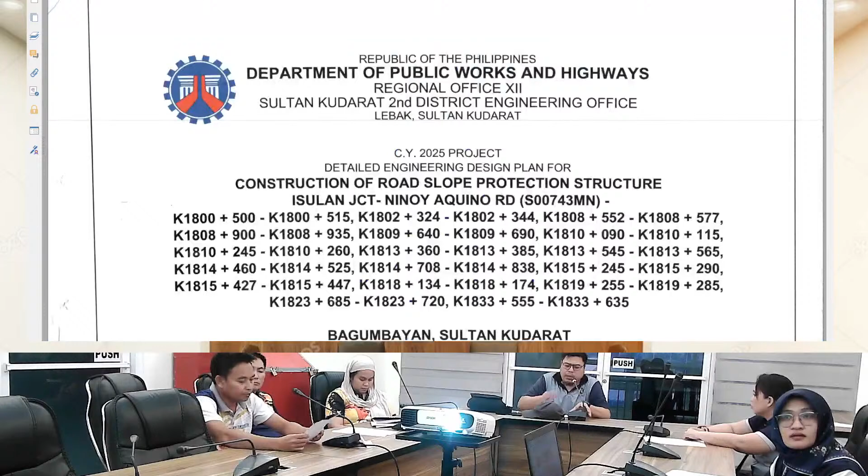The agenda of this pre-bid conference: first is the explanation and presentation of the basic contract data, including contract restriction, ABC, and the duration of the projects, to be given to us by the planning and design section. Here with us is Engineer Rafanhanie Kimamao and Engineer Farrah. After that, the BAC secretariat will be explaining the requirements of the bidding documents, including the instruction to bidders, general conditions of contract, and the special conditions of contract.

They will also discuss the document to be submitted by the bidders, as well as the post-qualification and post-evaluation of the projects. After that, we'll have questions and comments from the bidders, and the replies of the BAC.

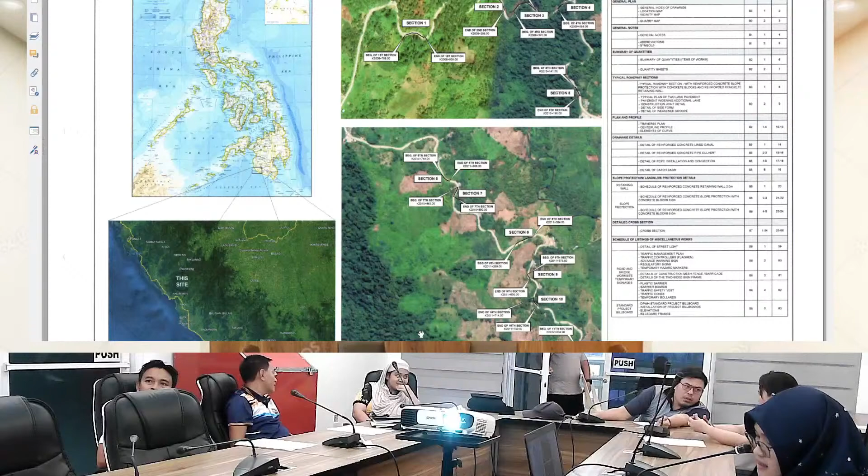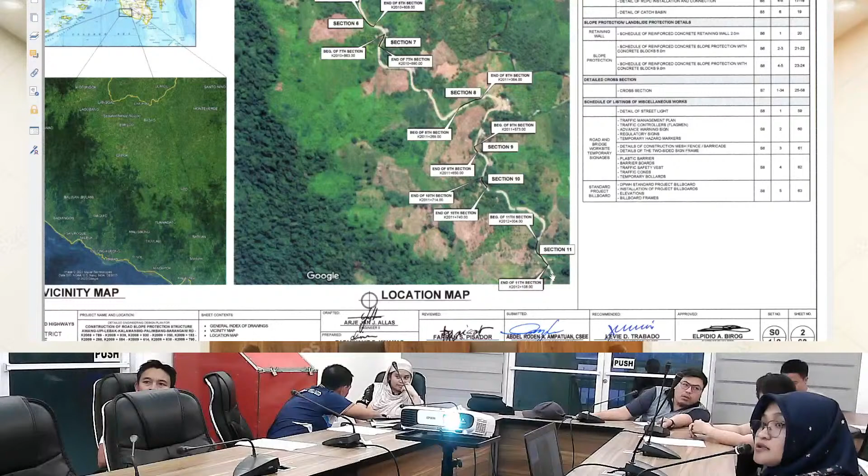This project consists of multiple construction of road slope protection along the stations stated in the project name. This is the location map of each section, from here up to here. This project has a total of 11 sections.

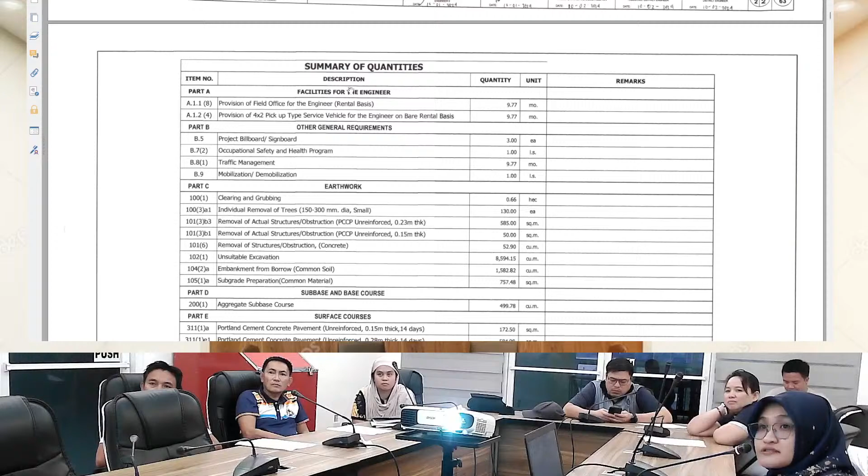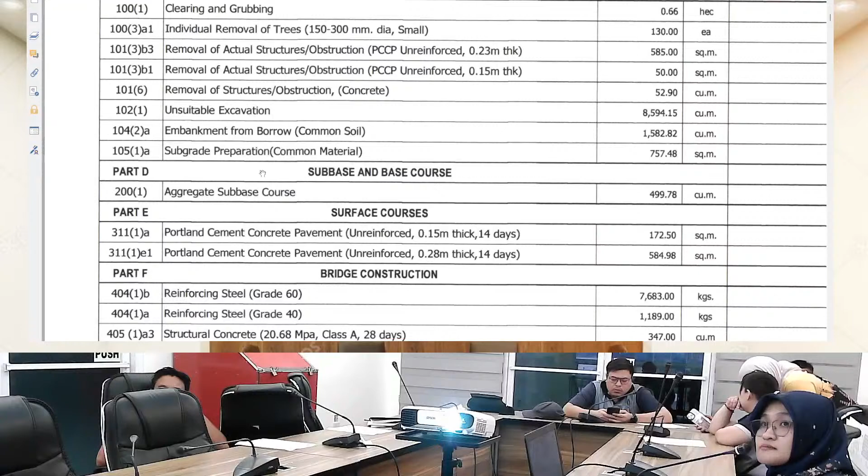These are some of the general notes, construction notes, abbreviations, and symbols found in the DED plans. This is the summary of quantities: provision of field offices for the engineer, provision of a 4x2 pickup type service vehicle, project billboard, signboard for DPWH and COA, occupational safety and health program, traffic management, mobilization and demobilization, clearing and grubbing under earthwork, individual removal of trees, removal of actual structures for the main PCCP and shoulder, removal of structure obstruction, PCCP for the shoulder, removal of concrete structures existing in the location, unsuitable excavation, embankment from borrow, and subgrade preparation.

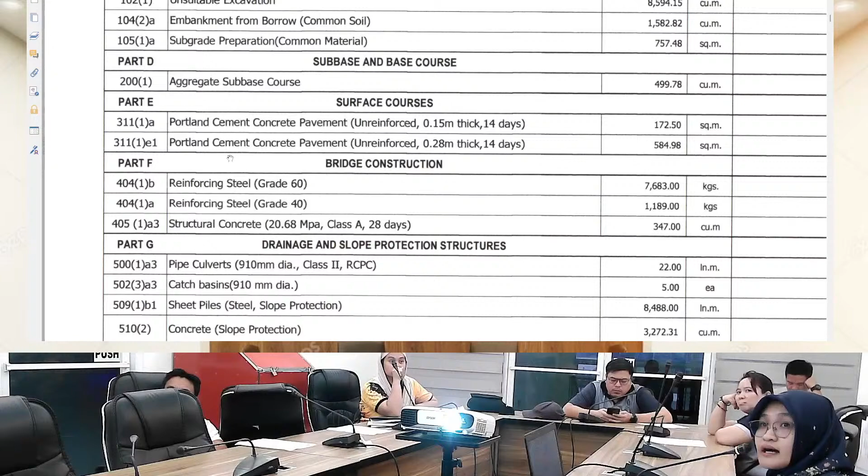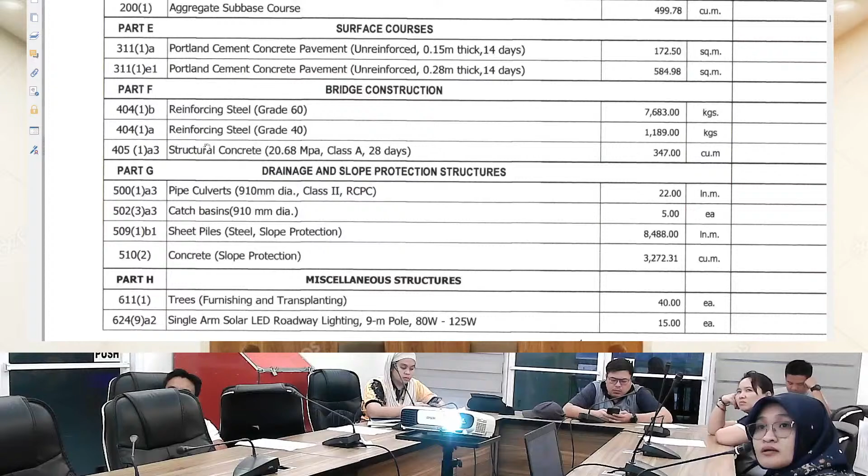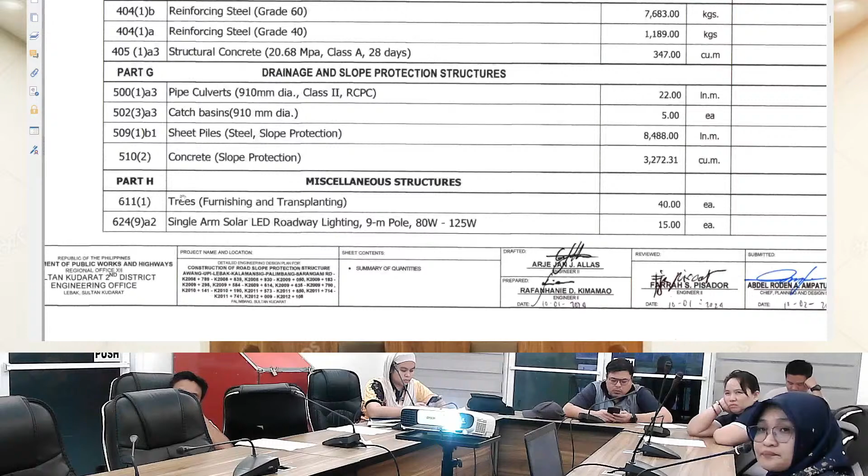Under subbase and base course, we have the aggregate subbase course. For surface courses, we will be replacing the main PCCP and shoulder, that's why we have PCCP unreinforced for the shoulder and for the main PCCP. Here we have reinforcing steel grade 60, and reinforcing steel grade 40. This is, I think, for the works on canals and catch basins, as well as the structural concrete for its concrete components. Here we have the pipe culvert, catch basin, sheet pile for the slope protection, steel sheet piles, and the concrete slope protection. We also have miscellaneous structures such as trees furnishing and transplanting, and of course single-arm solar LED roadway lighting with a 9-meter pole.

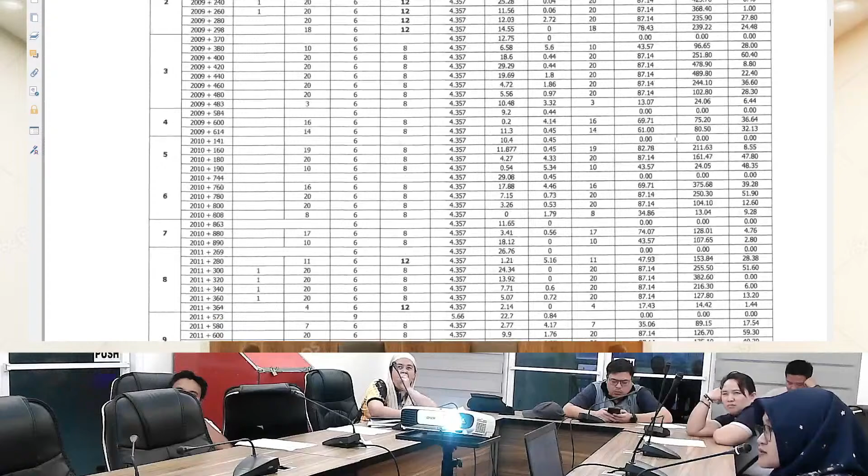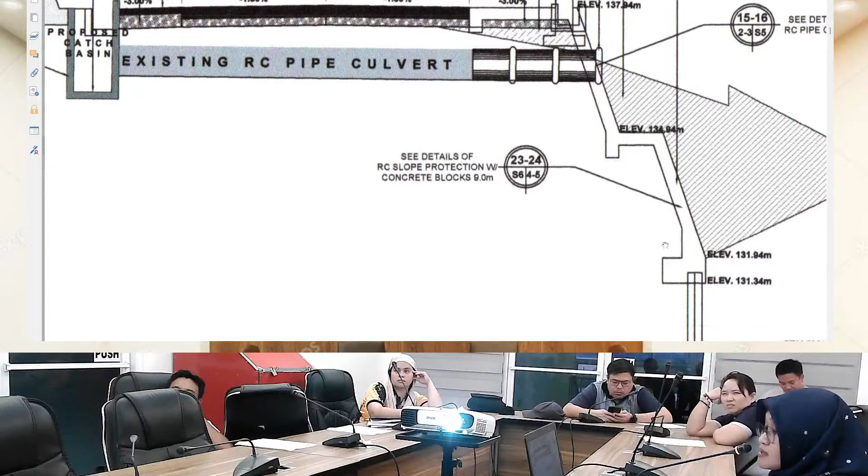This is the volume of the RC slope protection, volume of cut and fill. This is the station quantity. Then we have the typical sections, two different sections: the 6-meter type RC slope protection structure with sheet piles, and the 9-meter RC slope protection with steel sheet pile.

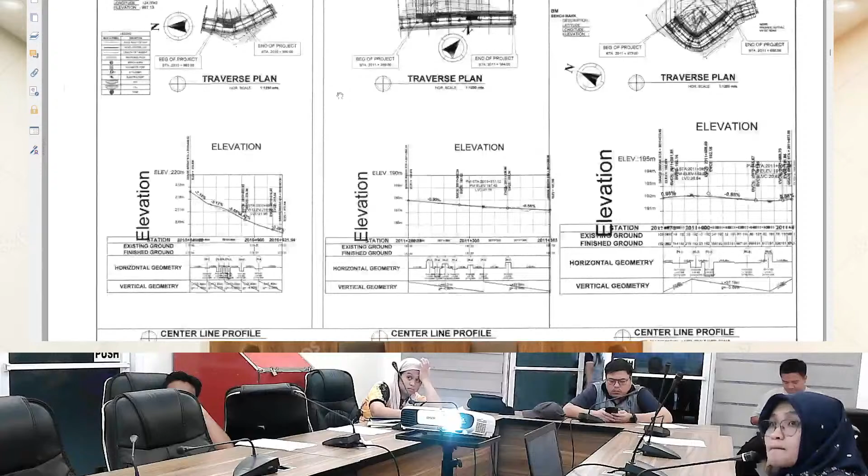Here for the construction of its PCC or its pavement, we have the typical plan of the 2-lane pavement, and we also have widening at some sections of this road's slip structures. So we have the profile and plan and profile of each section. As I've said, we have 11 sections for this project.

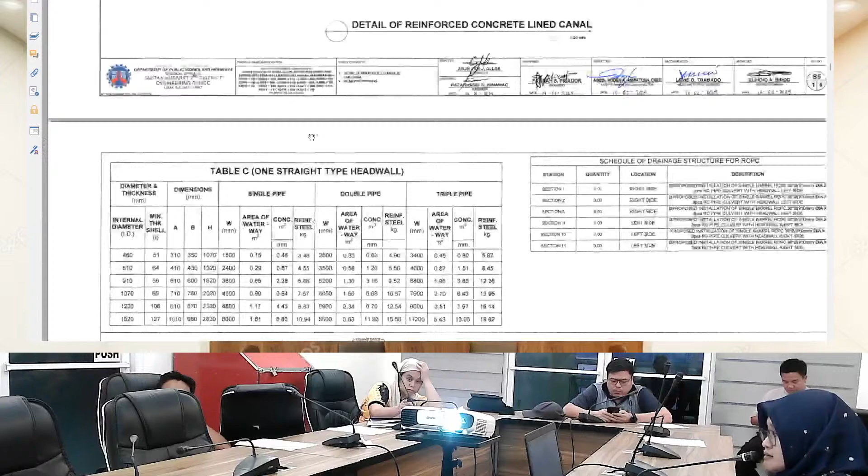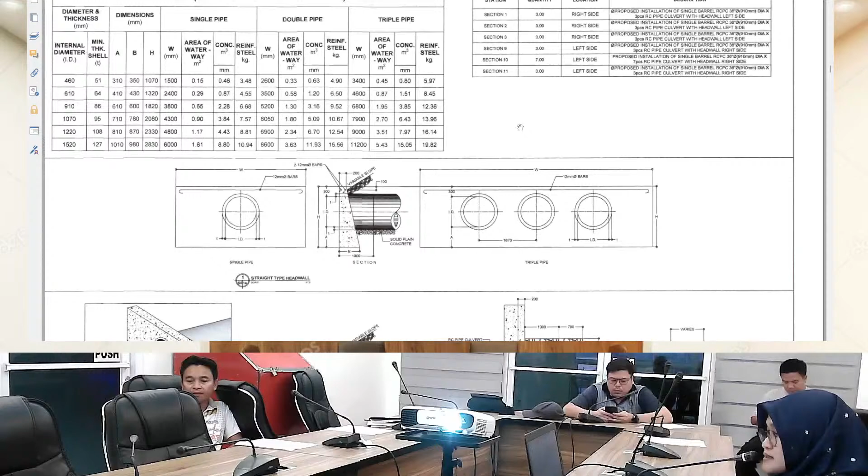Here is the head wall, details of the bars of the head wall, and the section, schedule of the drainage structure for the RCPC, showing which station or section it's located. This is the typical details for the head wall of the RCPC.

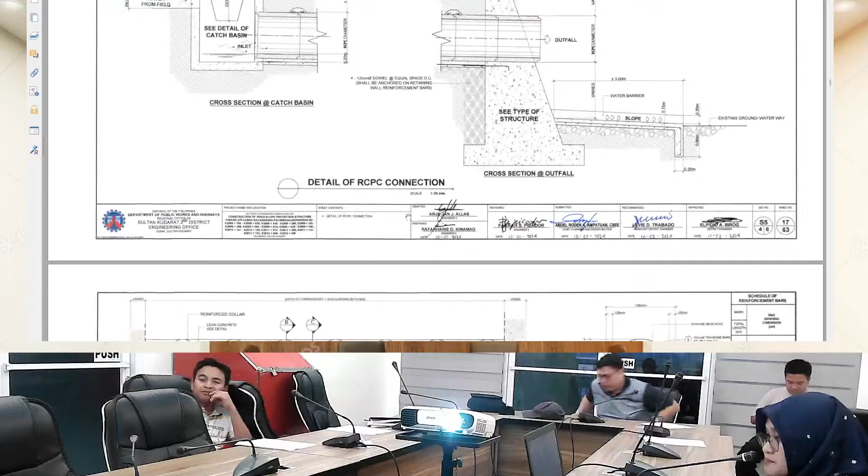Here we have the design requirements for the RCPC, where we find the required design components for the RCPC. Then we have the catch basin, the details plan and detailed cross-section of the catch basin and its RCPC connection.

This one is the details of the RCPC. In this project, we used 910mm diameter RCPC. Here are the details for the catch basin as well as its bars and the schedule of its reinforcement.

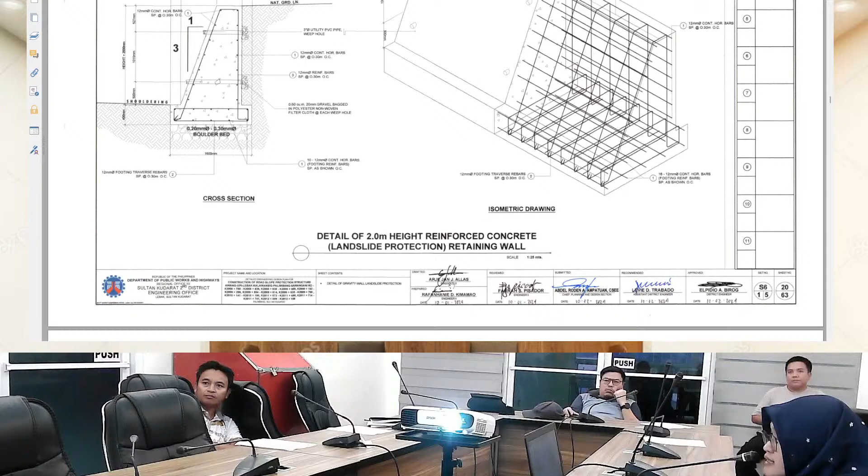We also have a retaining wall at some sections of this project. We put a retaining wall for the landslide side. It's 2 meters height reinforced concrete, and this shows its details.

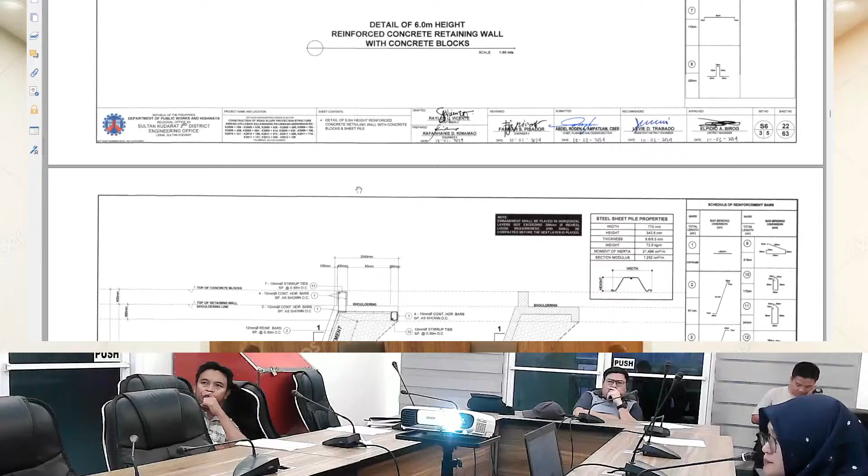This is another layout for the 6 meter height reinforced concrete. This one is the 9 meter height, so a 9 meter RC slope protection with an 8 meter height steel sheet pile. The sheet pile we used here is Z-type steel sheet pile.

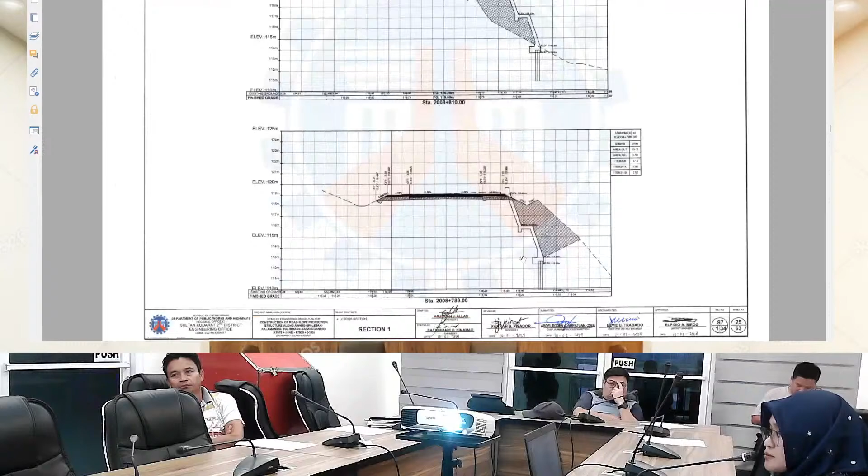Actually, only one section was used for the 9 meters; the rest is 6 meters. Here we have the details for its cross-section.

We can see here the area of cut, fill, area of item 200, 311, and PCCP of the main PCCP and the shoulder. So from page 25 up to... this is the detailed cross-section from page 25, at least 32 pages of cross-section.

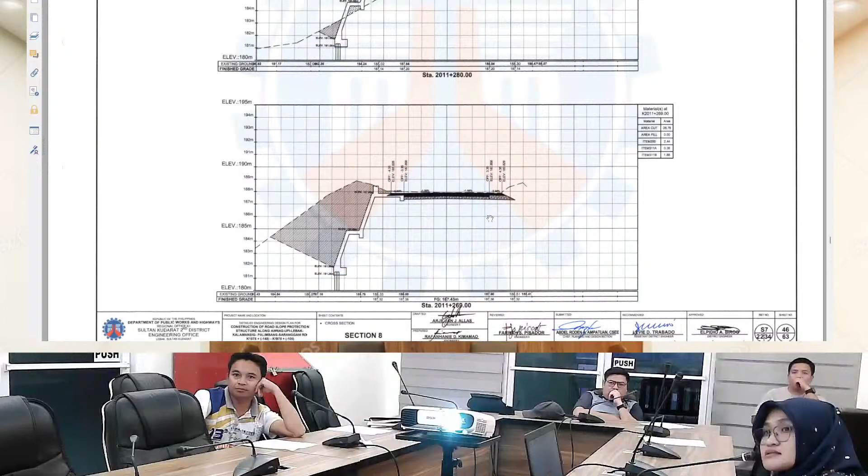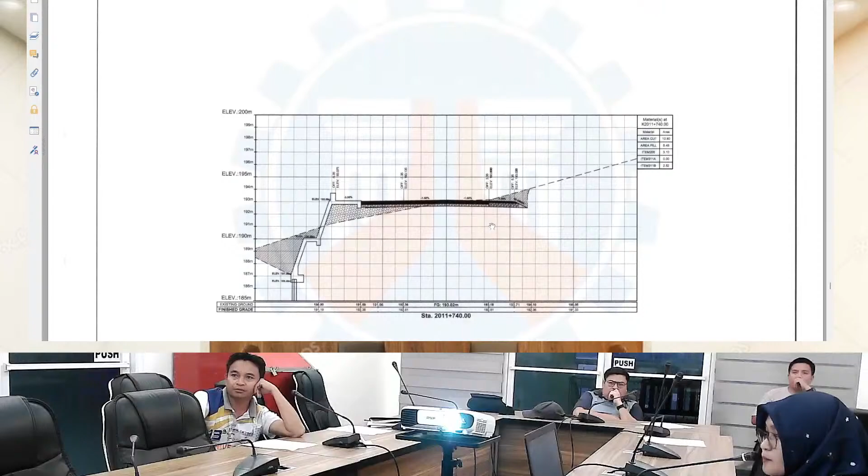Since we have 11 locations or sections where our structures will be placed, that's already 32 pages. So finally, from page 25 to page 56, I think that covers the cross-section pages.

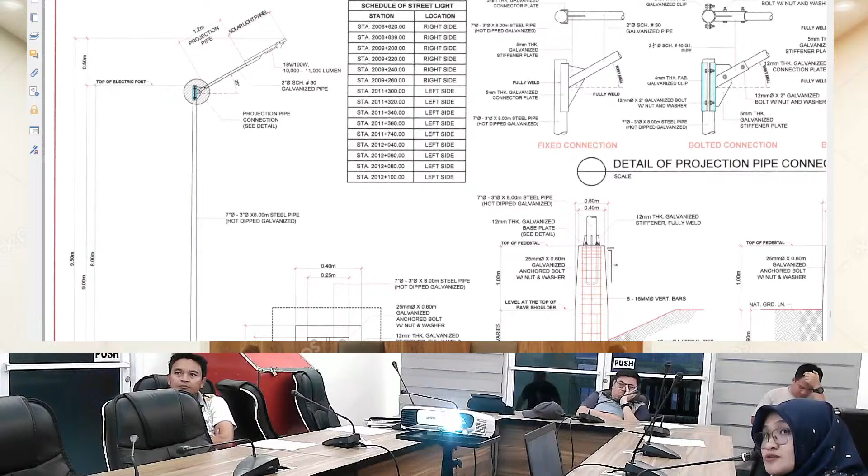And then we have some miscellaneous structures. We have street lights, and this shows the details of the post, and the components that our solar LED street lights should have. And of course, the schedule of street lights showing location, what side of the road, and where they should be installed.

By the way, for street lighting, what we can see here is the solar LED roadway lighting as well as its post. But the concrete post and the footing, we can see those in item 400, where the structural concrete and structural steel components of our post are indicated.

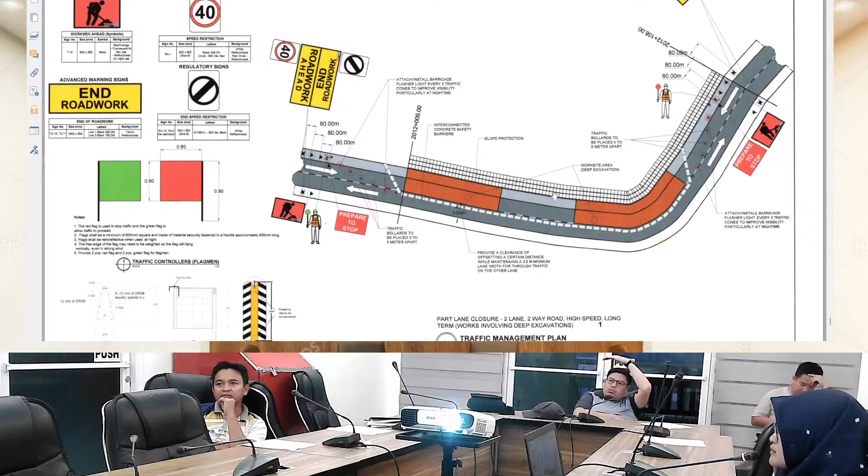Then we have the traffic management plan. This is the longest section since we have 11 locations, 11 sections. This is the longest, and this is what we decided to have as a typical section, since the work is not done all at the same time, or if it is, only 1 or 2 sections at once. So this is the typical traffic management plan.

And of course, the installed roadway safety signages, and more signages, as well as the safety gears of our workers. And of course, the details for the billboards for COA as well as for the DPWH billboard.

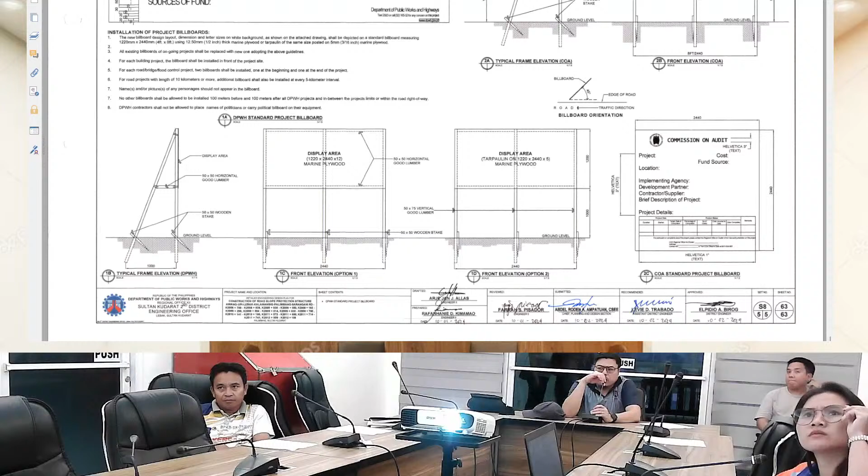You can also proceed to this office for further queries to our planning and design section. This will also be posted on our PhilGEPS. You can scrutinize it, then come to us if you have any comments or suggestions. If there are mistakes in the plans, since we are not perfect, you can also come to us and we will see to it that your concerns are acted upon. So next stop is the buildings.

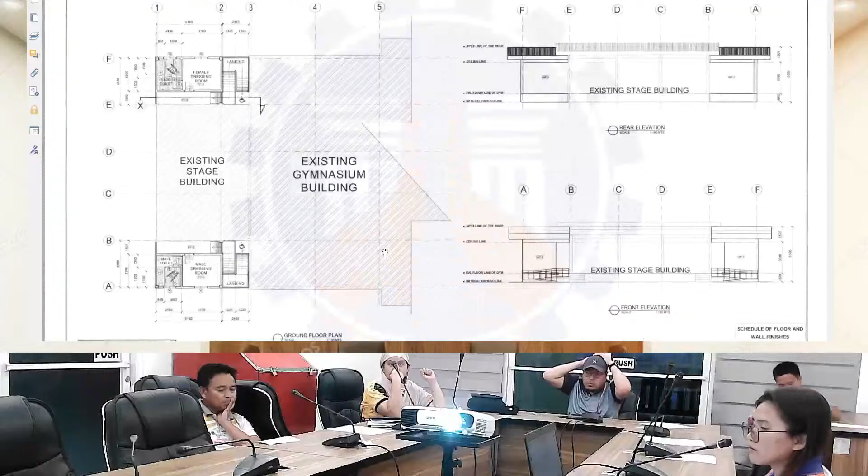And the site development plan and the location map. Next, we have the floor plan of the stage, here on the right side and here at the left side.

Next, we have the elevation for the rear and front, the typical side elevation and cross-section of the stage, schedules of doors and windows and its description, and the reflected ceiling plan of the expansion of our stage.

Next, we have here the roof plan, the details of the ramp, section detail of the toilets, here.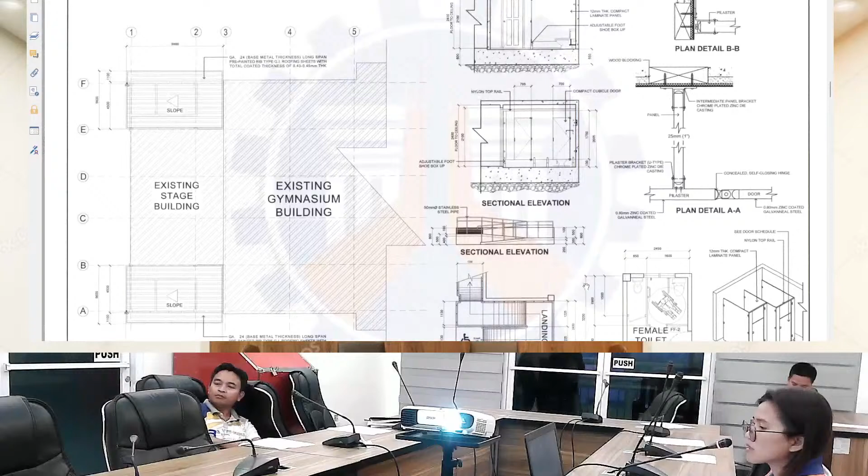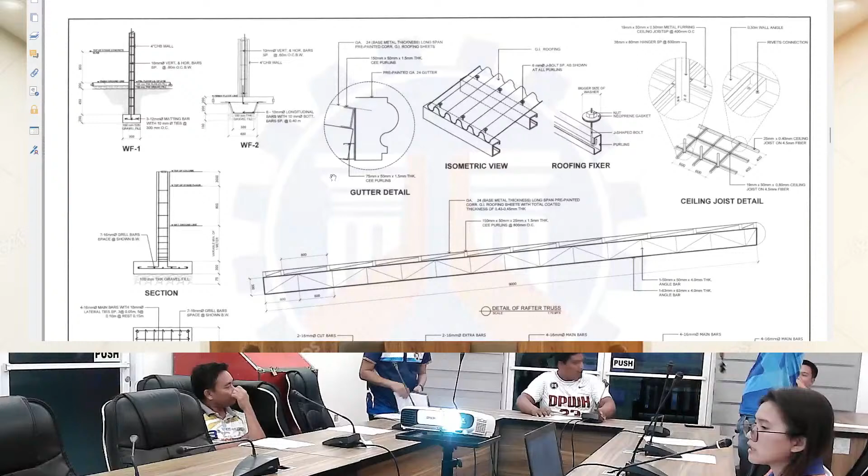Next, we have the foundation plan, the roof framing plan, and the details of our trusses, beams, ceiling, wall footing, footing to column, and beam detail. We also have here the general construction notes for our guidance.

And we also have here for our plumbing works, the water line layout plan and sanitary and drainage layout plan. We also have the isometric view, the detail of our septic vault, and the typical detail of our connections of pipings from vertical to horizontal.

Next, we have here for electrical works, the lighting and power layout plan. And for this page, we have the bill of quantities for the project.

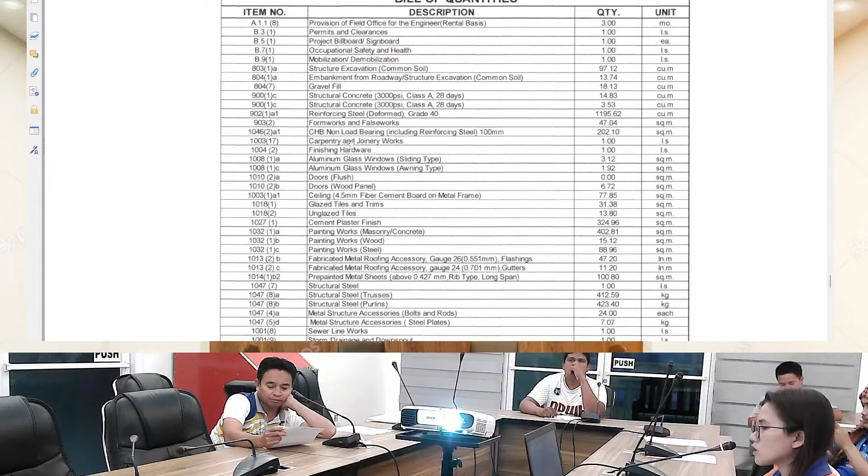We have here the provision of field office for the engineer, permits and clearances, project billboards and signboards, occupational safety and health, mobilization/demobilization, structure excavation for common soil, embankment for roadway or structure excavation common soil, gravel fill, structural concrete, reinforcing steel.

Grade 40, formworks and false works, CHB with reinforcing steel, carpentry and joinery works, finishing hardware, aluminum glass windows, sliding and awning type.

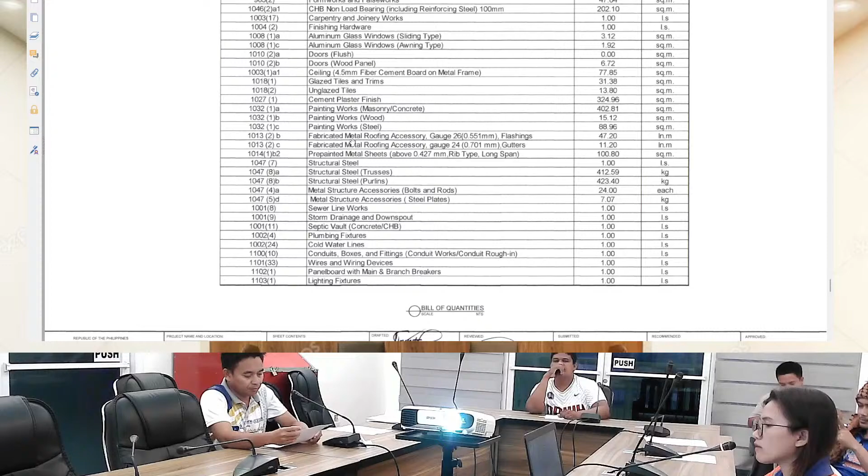For doors, we have flush and wood panel. We also have ceiling, glazed tiles and unglazed tiles, cement plaster finish, painting works for masonry/concrete, wood and steel. We also have the fabricated metal roofing accessories, flashing, gutter, and pre-painted metal sheets, long span roofing.

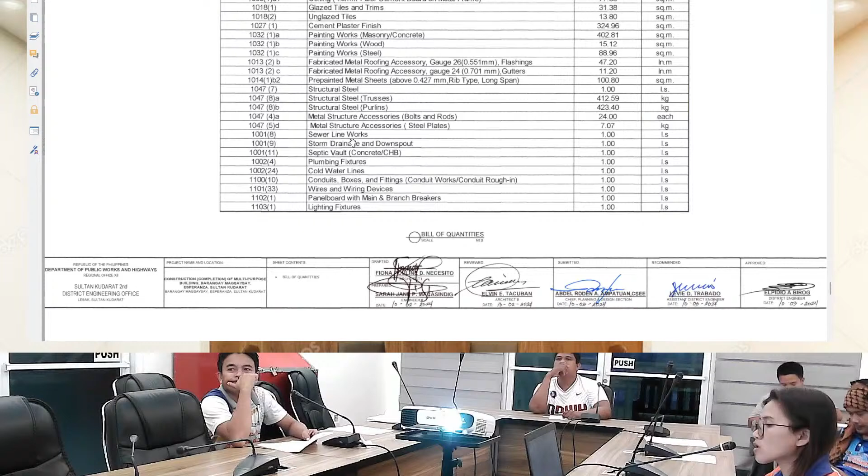For structural steel, we have trusses and purlins. For metal structure accessories, we have bolts and rods, steel plates. And for plumbing works, we have sewer line works, storm drainage and downspout, septic vault, plumbing fixtures, cold water lines. And for electrical, we have conduits, boxes and fittings, wires and wiring devices, panel board with main and branch breaker.

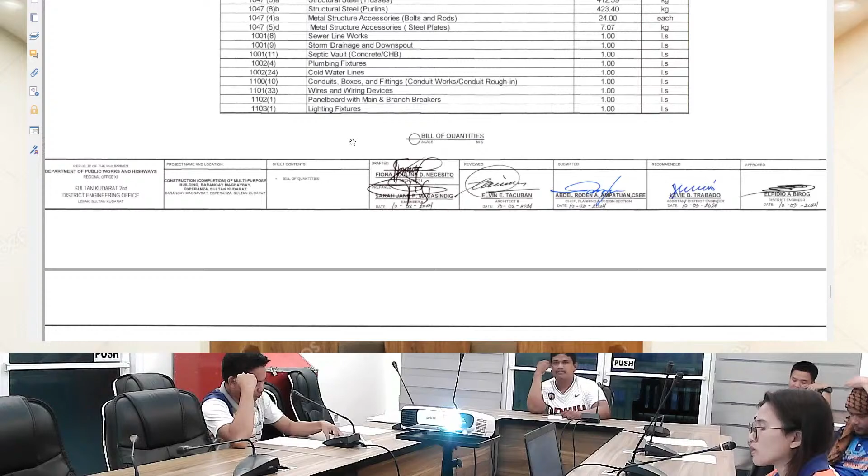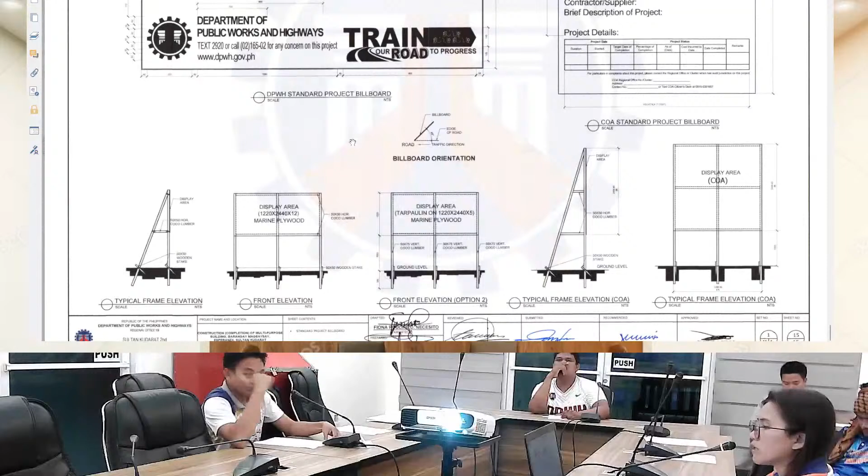For the next project, we have 25MH0059, construction completion of multi-purpose building, gymnasium, Barangay Villamor, Esperanza, Sultan Kudarat, with an ABC of 1,980,000 and a duration of 90 calendar days.

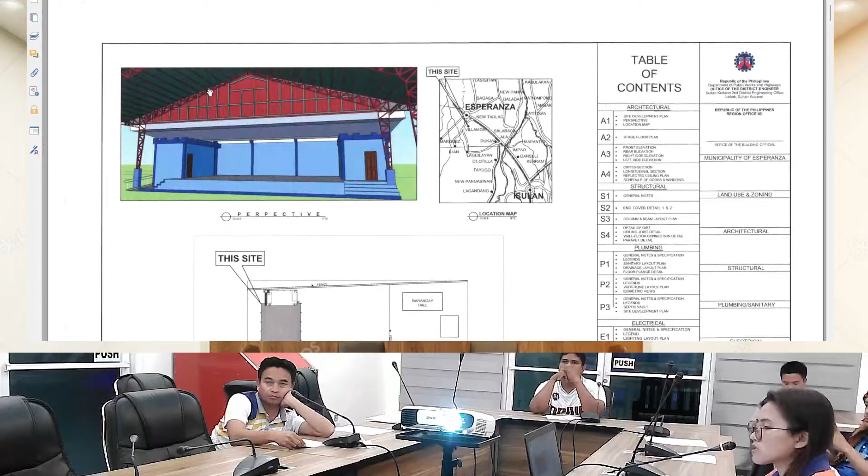This project is also intended for the stage of the gym, which focuses on the dressing room of the stage and the comfort rooms. This is our perspective, the location map, and the site development plan of the project.

Here we can see the existing structures and the proposed design dressing room floor plan, and the designations of the doors and windows, the details and dimensions.

We also have the elevations, the rear, left, front, and right side elevation, the longitudinal section and cross section, and the reflected ceiling plan, the schedule of doors and windows, schedule of floor and wall finishes.

Next, we have the general construction notes, the detail of the end cover 1 and 2, the column and beam layout of the proposed dressing room, and the section details of the beams here.

Next, we have the details of ceiling, detail of girt, the detail of the stage parapet, and we also have the wall floor connection detail here.

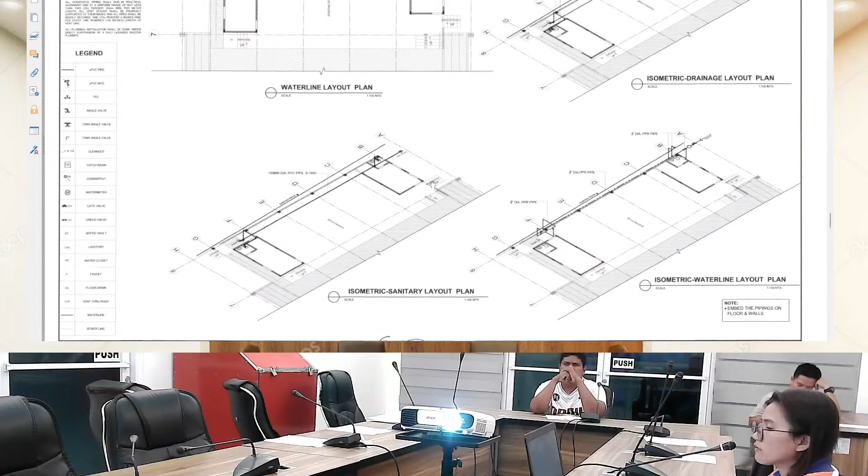Next, for the plumbing works, we have the sanitary and drainage layout plan, together with the detail of the connections, the waterline layout plan, and the isometric views of each layout, the detail of the septic vault.

The layout of lighting and power for electrical works. We have here the schedule of the load schedule, and also the geohazard map.

For the quantities, bill of quantities, we have provisional field office for the engineers on rental basis, permitting clearances, project billboard/signboard, occupational safety and health, mobilization and demobilization, structural concrete, reinforcing steel.

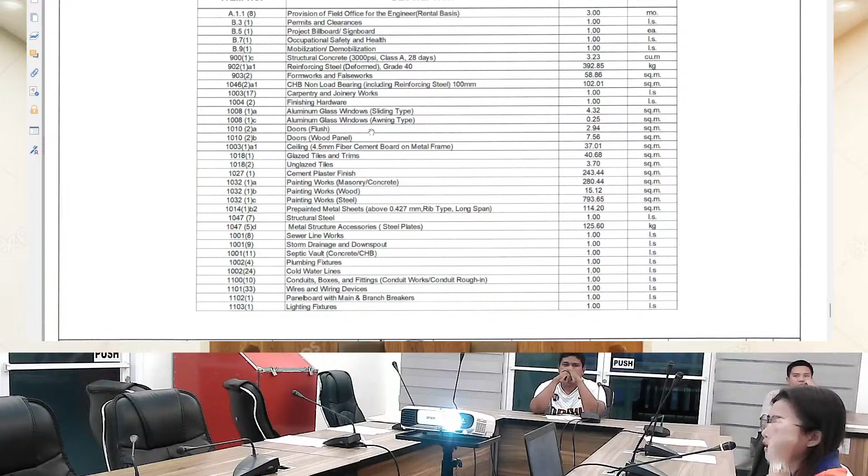Grade 40, formworks and false works, CHB including the reinforcing steel, 100mm thick, carpentry and joinery works, finishing hardware, aluminum glass windows, sliding and awning type, flush doors and wood panel.

Ceiling glazed and unglazed tiles, cement plaster, painting works for masonry, wood and steel. We have also here pre-painted metal sheets, long span roofing, structural steel, and metal structure accessories such as steel plates.

For plumbing works, we have the sewer line works, storm drainage and downspout, septic vault, plumbing fixtures and cold water lines. For electrical, we have the conduits, boxes and fittings, wires and wiring devices, panel board with main and branch breakers, and lastly, the lighting fixtures.

For the last page, we have the typical or the detail of our standard project billboards for DPWH and COA.

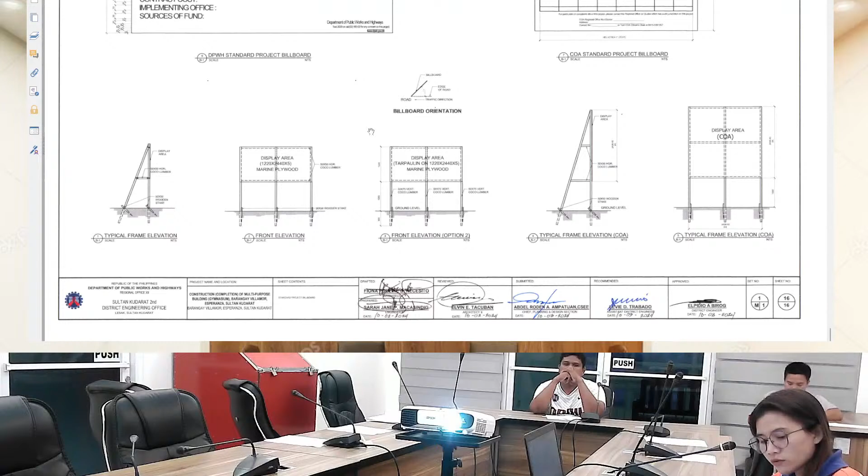For the next project, we have 25MH0099, construction completion of multi-purpose building, gymnasium, Barangay Kiadsam, Senator Ninoy Aquino, Sultan Kudarat, with an ABC of 2,475,000 with a duration of 90 calendar days.

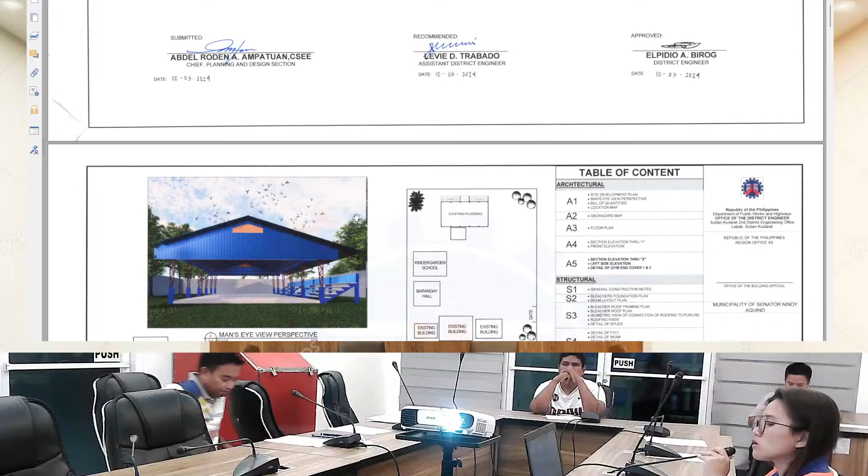This project is intended for the completion of the gymnasium of Barangay Kiadsam, focused on the features located at the right side of the gym. This is the perspective view.

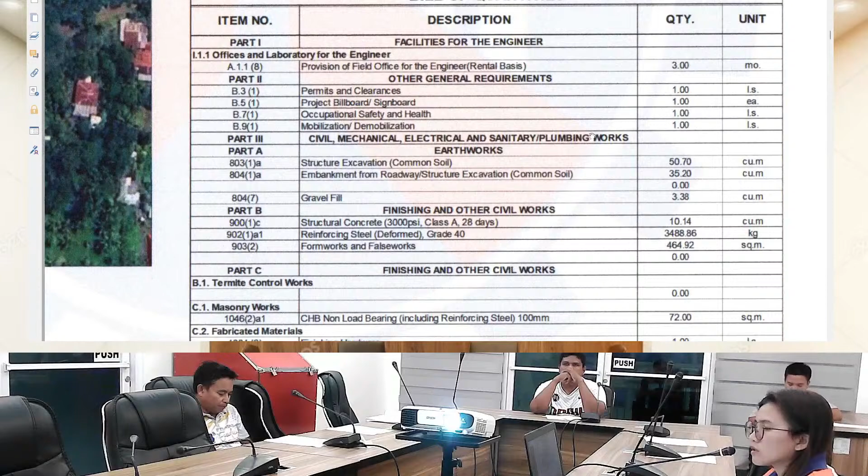The location map and the bill of quantities for these projects: provisions of field office for the engineers, permit and clearances, project billboard/signboard, occupational safety and health, mobilization and demobilization. For earthworks or civil works, we have the structure excavation from common soil, embankment from roadway/structure excavation.

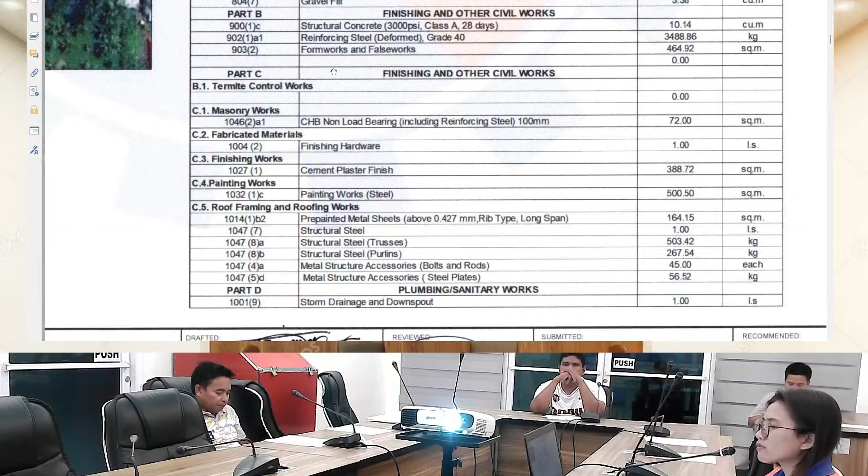Common soil, gravel fill. For finishing other civil works, we have the structural concrete, reinforcing steel grade 40, formworks and false works, and CHB non-load bearing, including reinforcing steel, 100mm thick.

Finishing hardware, cement plaster finish, painting works for steel only, pre-painted metal sheets, long span roofing, structural steel for trusses and purlins, metal structure accessories for bolts and rods, and steel plates.

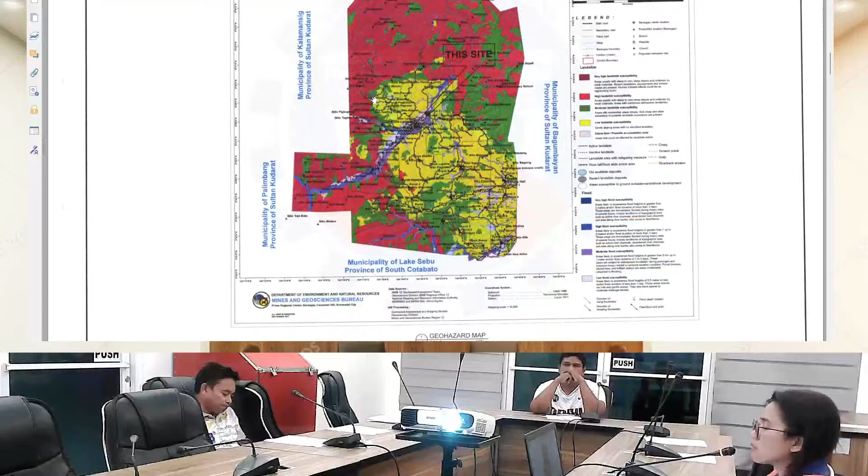And for plumbing works, we have the storm drainage and downspout. Next, we have the geohazard map of the project here.

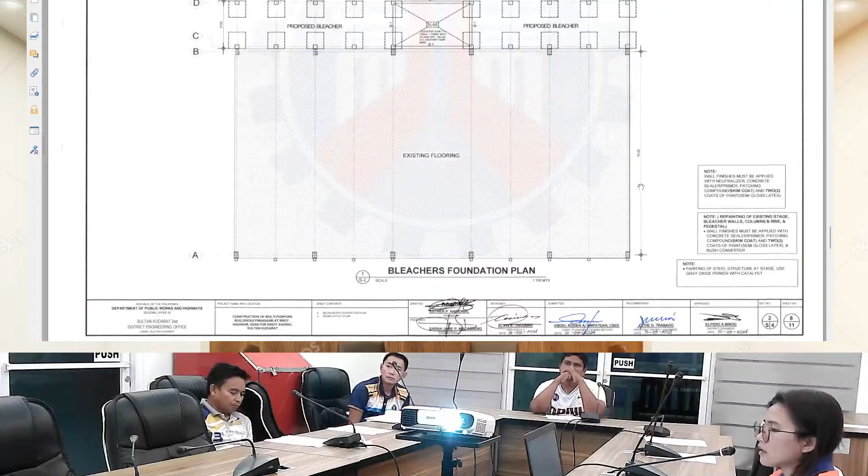Next, we have the detail for the roof framing of the bleacher and the roof plan, together with its spot detail for the roofing, the connection of the roof and the purlins, and the splicing of these purlins and the trusses.

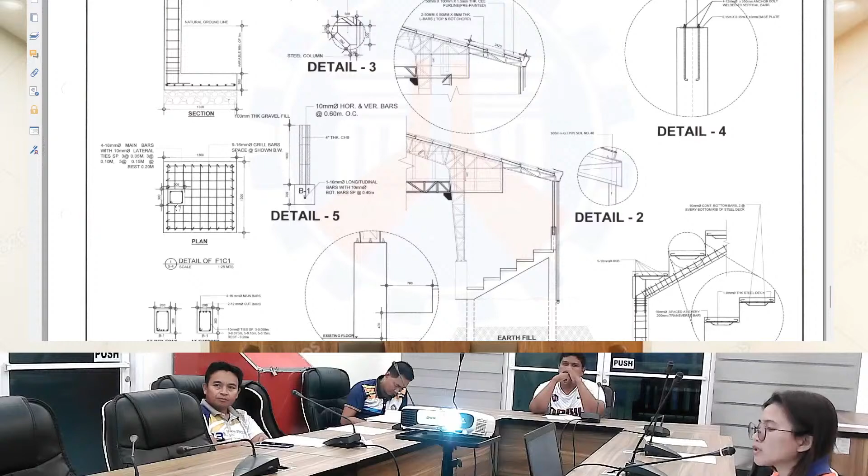Next, we have the detail for the girt, the reinforcing details for the bleachers, and the reinforcing details for footing 1 and column 1, and the beam detail.

Next, we have the typical detail or the detail for our COA and DPWH standard project billboard.

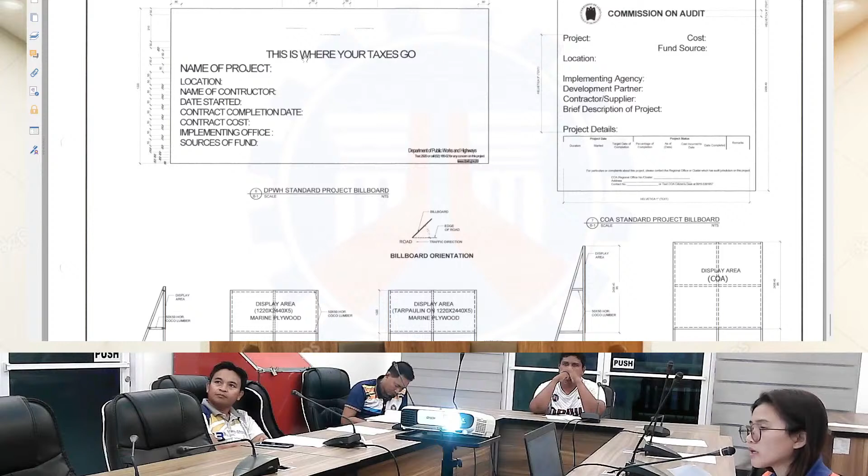Lastly, for the next project, we have 25MH0108, construction completion of multi-purpose building at DPWH Sultan Kudarat 2nd District Engineering Office, Lebak, Sultan Kudarat, with an ABC of 16,660,000 with a duration of 235 calendar days.

This project is intended for the completion of our 3-story building, the DPWH 3-story building office.

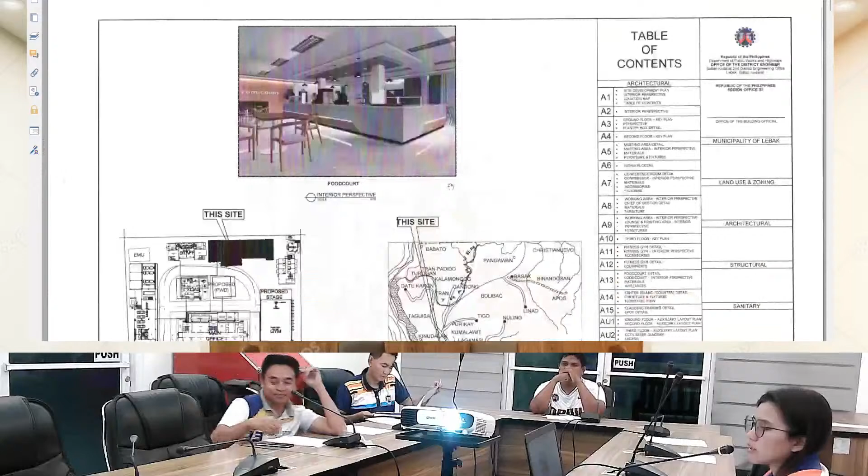Here we have the site development plan of our project in our compound, the location map, and we have also the interior perspective located at the 3rd floor, which is our food court here.

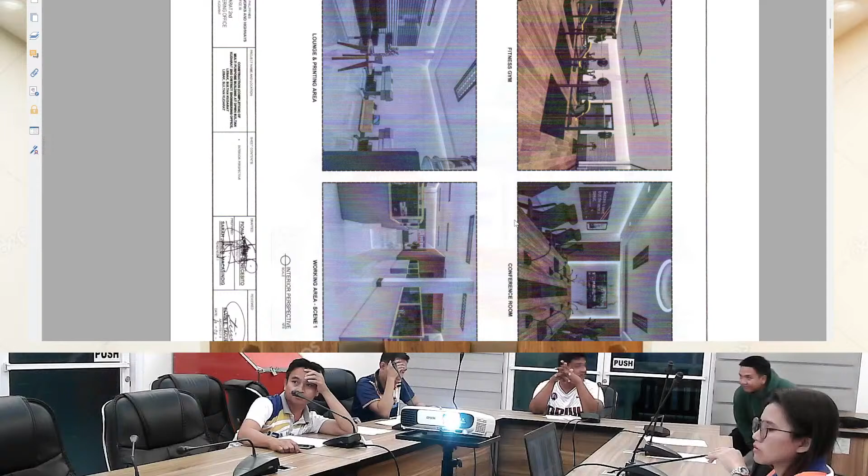Next, the interior perspective for our fitness gym, conference room, waiting area, lounge and printing area, working area, and for scene 1 and scene 2.

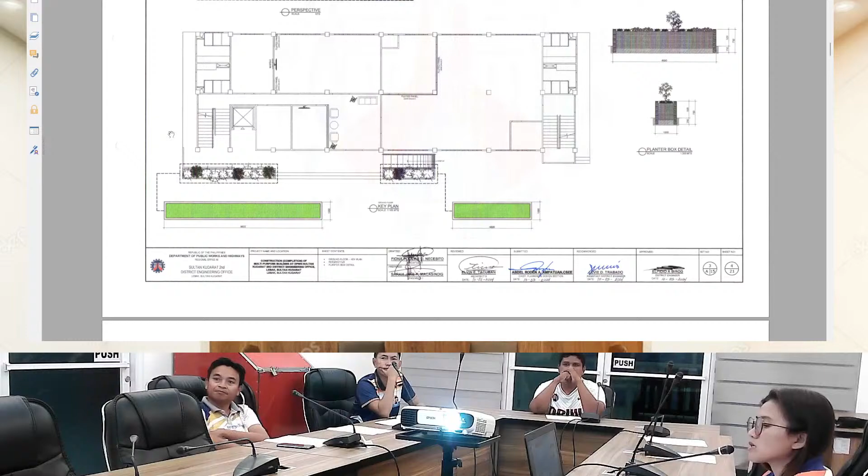Next, for the interior, we have also the planter box location and its detail, and the interior detail, which is where the interior perspective that I shown earlier here.

Next, we have here the interior perspective for the signages for the planning and design section at the second floor.

We have also here the furniture descriptions and details or the specifications.

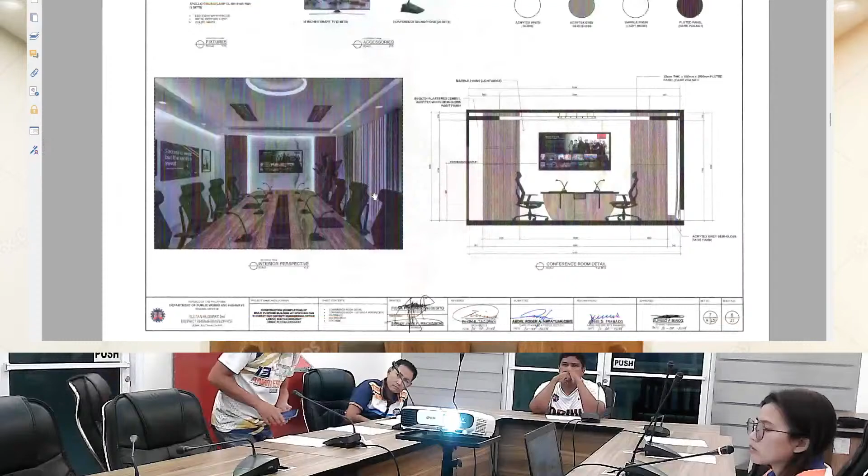We have also here our conference room detail and its fixtures, materials, and accessories.

Next, we have also the chief section detail or interior chief section detail of the offices here in the furniture.

We have also here the furniture and the interior perspective.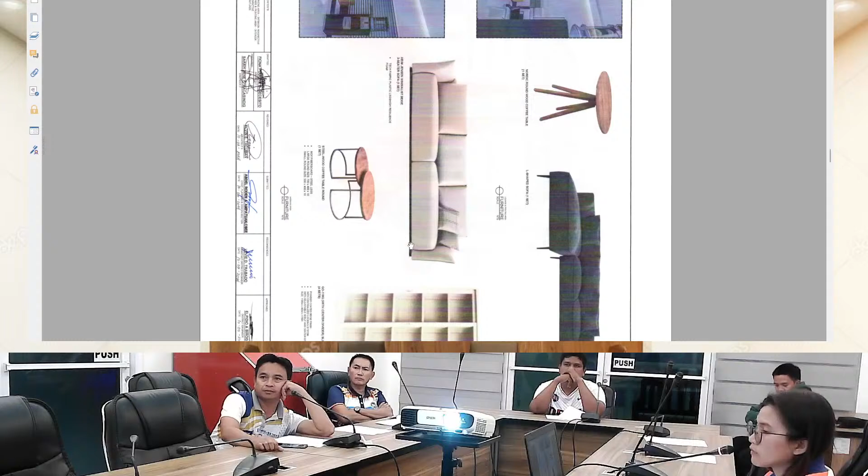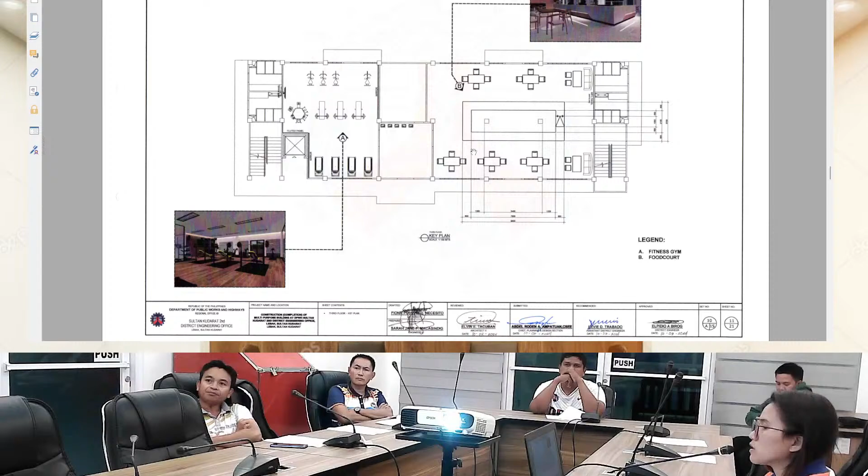Next, we have the key plan or the location of the fitness gym and our food court at the third floor, together with its spot details, materials, and accessories.

This is for the gymnasium. We have here the equipments. We included equipments for the gym in its details.

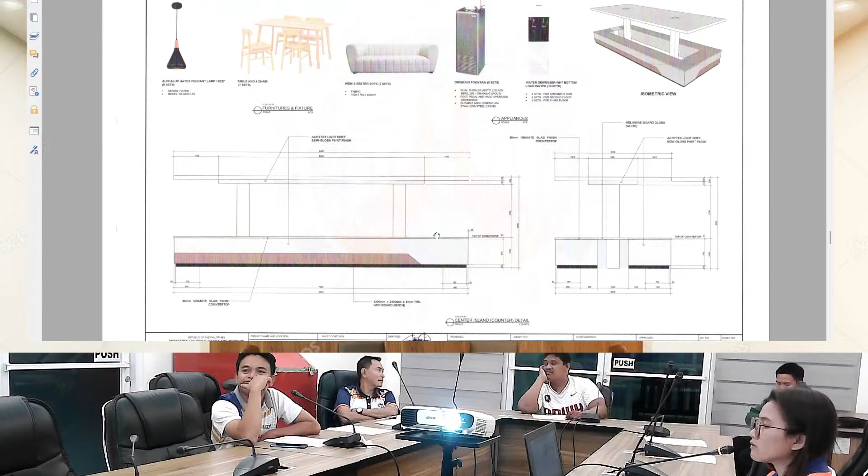For our food court, we have here the food court counter at the center, together with its detailed dimensions, materials, and descriptions. We have also here the detail for the furnitures and accessories in our food court.

Next, we have the detail for our cladding, which is located at the rear, left, and right side of the building.

Next, we have also here the auxiliary layout plan for the ground floor, second floor, and third floor in its riser diagram.

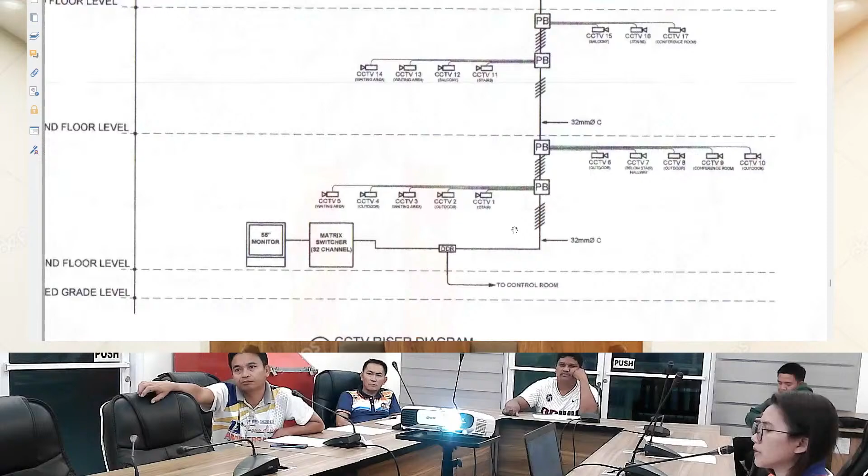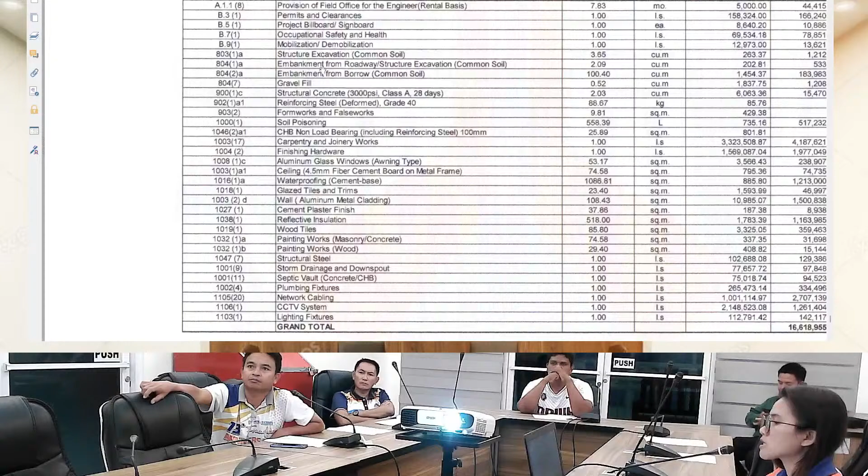For the bill of quantities of the project, we have here the provision of field office for the engineer, permits and clearances, project billboard/signboard, occupational safety and health, mobilization and demobilization, structure excavation for common soil, embankment from roadway/structure excavation common soil, embankment from borrow, gravel fill, structural concrete, structural reinforcing steel grade 40, formworks and falseworks, soil poisoning, CHB of non-load bearing, including reinforcing steel 100 mm thick.

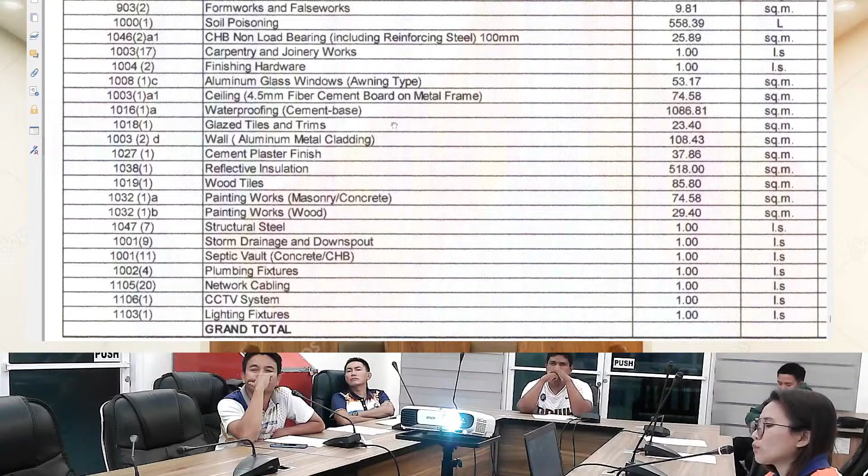Carpentry and joinery works, finishing hardware, aluminum glass window, awning type, the ceiling, waterproofing, glaze tiles, wall cladding, aluminum metal cladding, cement plaster finish, reflective insulation, wood tiles.

Painting works for masonry and wood, steel, structural steel, storm drainage and downspout, septic vault, plumbing fixtures, network cabling, CCTV system, and lastly we have also the lighting fixtures.

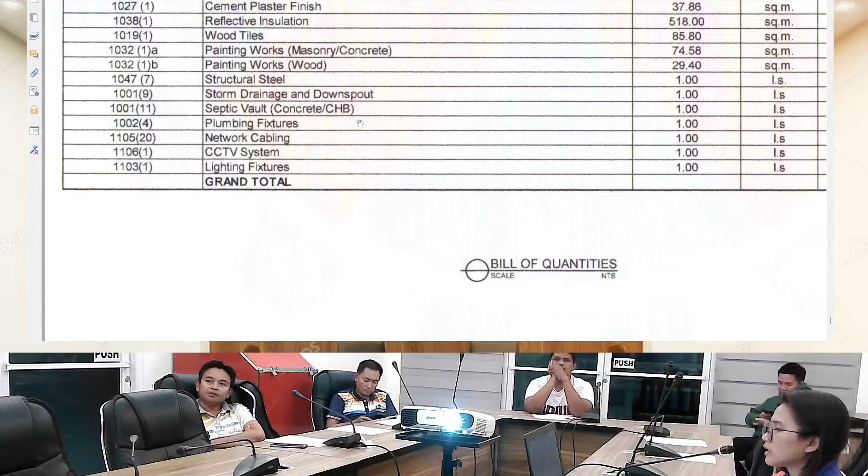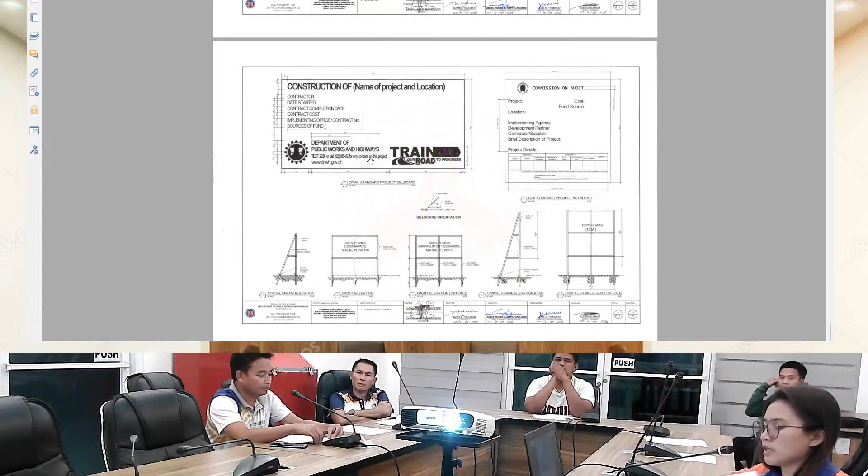We now proceed to the next agenda: the documents to be submitted by the bidders.

Of course, we are using the two envelope system: one is the technical proposal and the financial proposal. So under the technical component envelope, the Class A documents, legal documents, the valid PhilGEPS registration certificate.

It should be platinum membership registration certificate, DTI, sole proprietorship, cooperative CDA, cooperative municipal document, and mayor's permit or business permit issued by the city municipality, and tax clearance per EO number 398 series of 2005.

Again, I'm reminding all prospective bidders to please update your eligibility documents at the CWA Central Office so we can avoid delays in the opening of bids.

And we have here the technical documents, of course, the statement of the prospective bidder of all its ongoing government and private contracts, including contracts awarded but not yet started, if any, whether similar or not similar in nature.

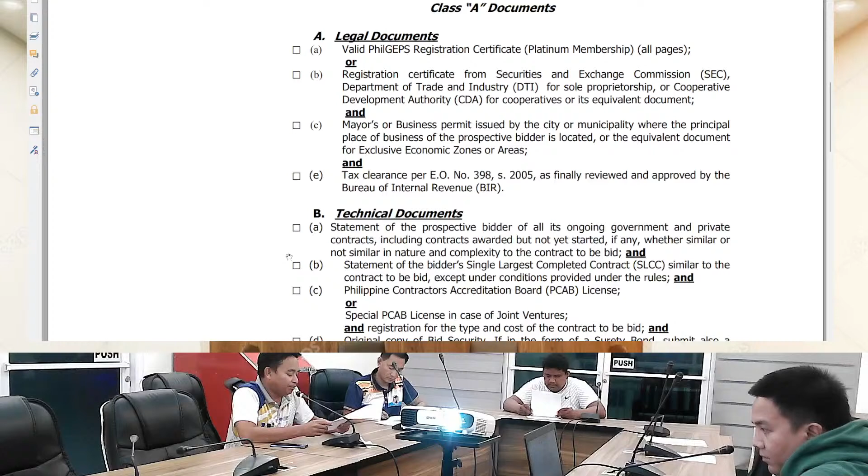Next, the statement of bidder's single largest completed contract or the SLCC, similar to the contract, will be except under conditions provided under the rules. And we have here the PCAB license or special PCAB in case of joint ventures.

Next is the original copy of bid security in the form of surety bond, with also certification issued by the IC or the Insurance Commission.

Or the original copy of notarized bid securing declaration. And also we have the project requirements which shall include the following.

Organizational chart, which includes the list of contractors' key personnel, which should be accredited by the Department of Public Works and Highways: the project manager, project engineers, materials engineers, and the foreman to be assigned to the contract to be bid.

Next is the list of contractor's major equipment units which are owned, leased, or under purchase agreements, supported by proof of ownership or certification of availability of equipment from the equipment lessor or vendor for the duration of the project, as the case may be.

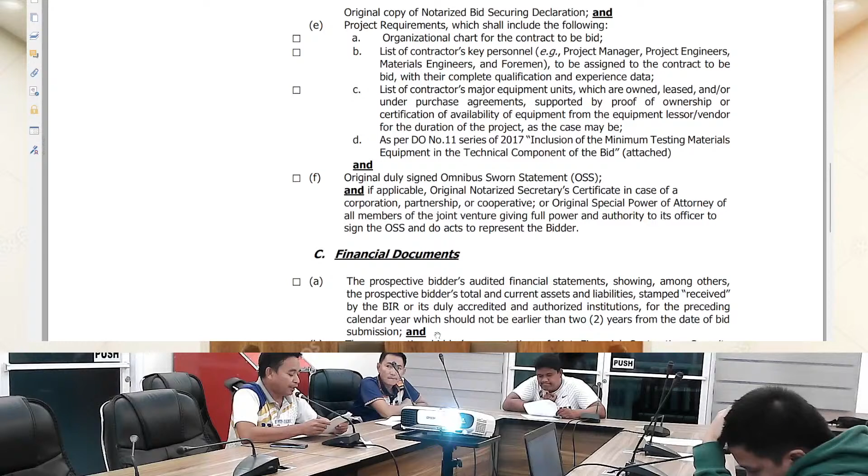Again, we need proof here - if it's yours, proof of ownership; if leased, there should also be a certification of availability of equipment from the lessor or the vendor.

Next is, as per DO number 11, series of 2017, the inclusion of minimum testing, materials, equipment, in the technical component of the bid.

This should be observed. And the original duly signed - again, duly signed omnibus sworn statement, the new form.

10 items po yun. And if applicable, in case of corporation, partnership or cooperative, original special power of attorney of all members of the joint venture, or the joint venture po ito.

Next, we have the financial documents. First is the prospective bidder's audited financial statement showing, among others, the prospective bidder's total and current assets and liabilities, stamp received by the BIR or its duly accredited and authorized institutions for the preceding calendar year, which should not have been earlier than 2 years.

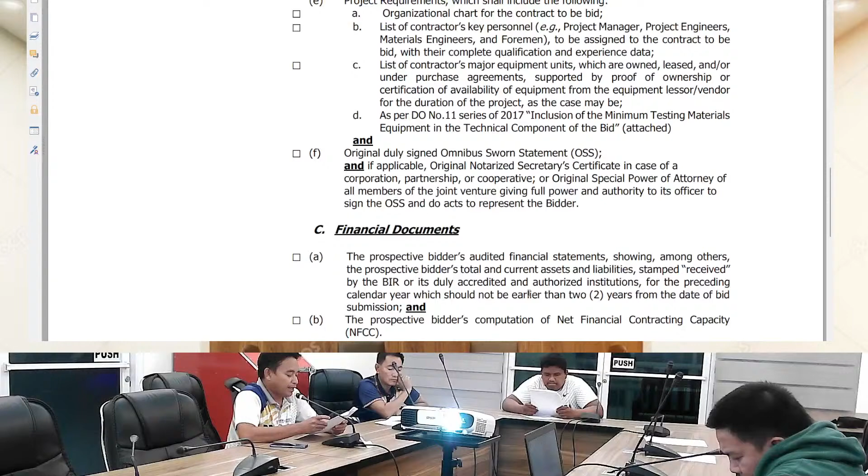Next is, of course, the prospective bidder's computation of the NFCC. Next, under financial documents, yung class B, for the joint venture. Dapat you design joint venture agreement.

Isasabihin niyo po yun, in accordance with RA 4566 and its IRR. Or the notarized statement from all the potential joint venture partners stating that they will enter into and abide with the provisions of the JVA in the instance that the bid is successful.

Next in below is the financial proposal. Of course, yung financial proposal should compose of the original of duly signed and accomplished financial bid form. Pinaka-important po yung bid form.

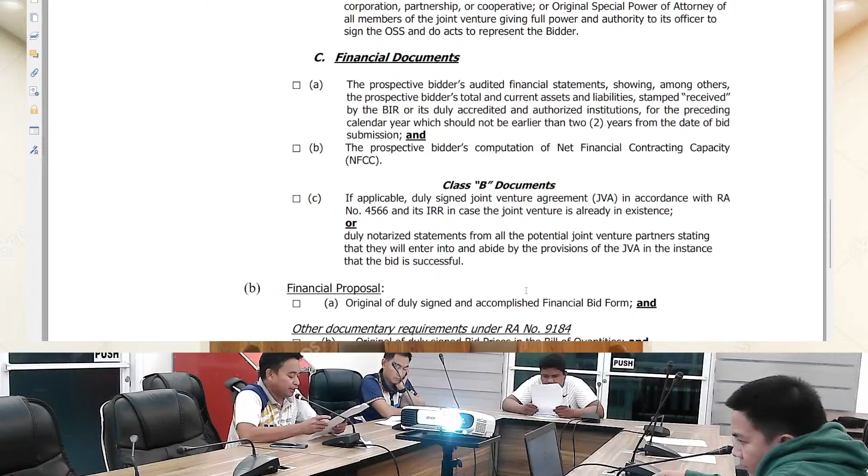Other document requirements under RA number 9184 is duly signed bill of quantities or the BOQ. The duly accomplished detailed estimate form, including a summary sheet indicating the unit price of construction materials, labor rates, and equipment rentals used in coming up with the bid. And the last document is the cash flow by quarter.

Before we end this agenda, again, i-remind po natin ulit yung ating mga contractor, mga prospective bidders para po sa opening bids natin. Dapat po updated po yung inyong eligibility documents sa central office through CWA.

So let's proceed to the next agenda, the criteria and procedure of eligibility check, preliminary examination of bids, detailed evaluation of bids, post qualification, and the award.

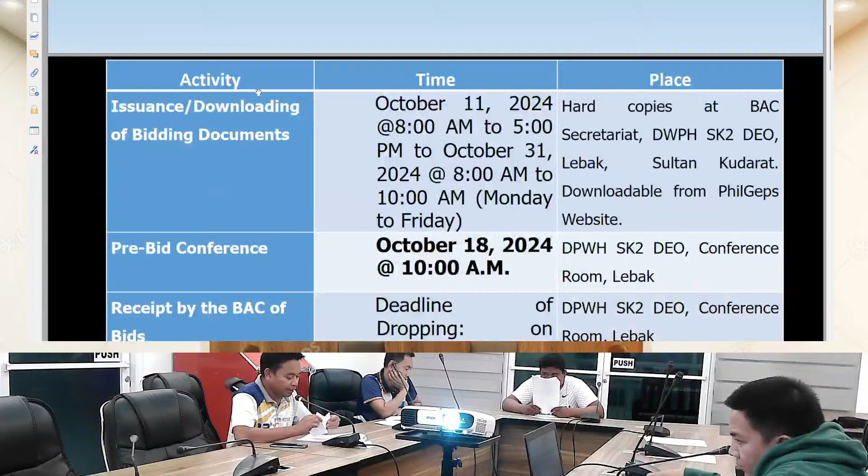So, alam naman po natin na pamilyar po yung ating mga bidders dito sa tinatawag na CWA o ito po yung Civil Works Application. Ang ating electronic eligibility ay piniprepare po ng CWA, subalit ito po ay electronic. So, bago po tayo mag-electronic eligibility check, nagkakaroon po muna tayo ng contract profiling.

Dito sa contract profiling, dito po natin ini-input yung mga basic contract data. For example, the most important is the contract ID, the contract duration, contract name, major category, etc. Ito po yung magiging basihan ng system natin para ma-determine po yung bidder for particular contract ID if eligible or ineligible.

So, bali, automatic po yan. System po yan ang nag-check niyan. Yung pong ating eligibility check ay almost done simultaneously with the opening of bids.

Habang po yung mga BAC members ay nag-o-open ng technical proposal, tayo naman po ay nag-ha-handle ng electronic eligibility. Only those bidders who have purchased the bidding documents and at the same time drafted their bid envelope for particular contract ID, yun lamang po ang makakasama sa electronic eligibility processing.